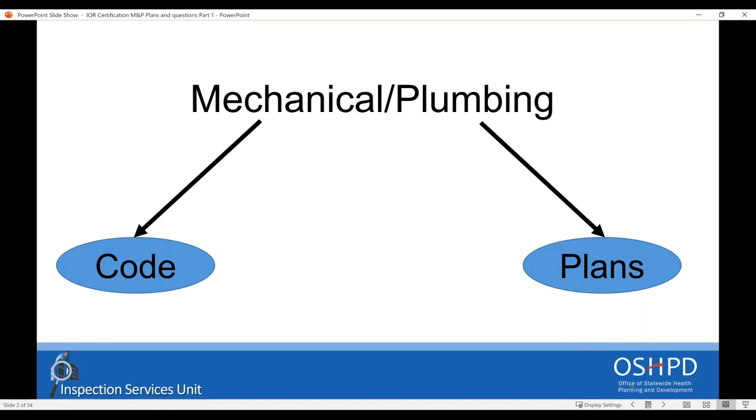The mechanical and plumbing discipline has 2 parts of the exam, the code part and the plans. The code portion for Class A will have 10 questions, for Class B will have 12 questions.

A sample that is not included in the actual exam about code for mechanical reads: in fuel gas piping, per pressure testing and inspection, the minimum test pressure and test duration for a hospital with fuel gas piping at house pressure should be no less than, and there are 4 options for answering. But how are you going to look for the response, unless you know right away?

In the mechanical code, there is a list of chapters, like any other discipline. In the chapter list, there is fuel gas piping, which is chapter 13, as you can see, highlighted in yellow on your screen, maybe tiny right now.

So what would you need to do? You will go to chapter 13. The question is about the test pressure, so you will look to the test pressure section, which is 1313.3. You will read through, and it's highlighted where it says no less than 10 psi, and in no case less than 15 minutes. Therefore, the right answer will be C.

Is anybody having any question for this? Raise your hand if you need.

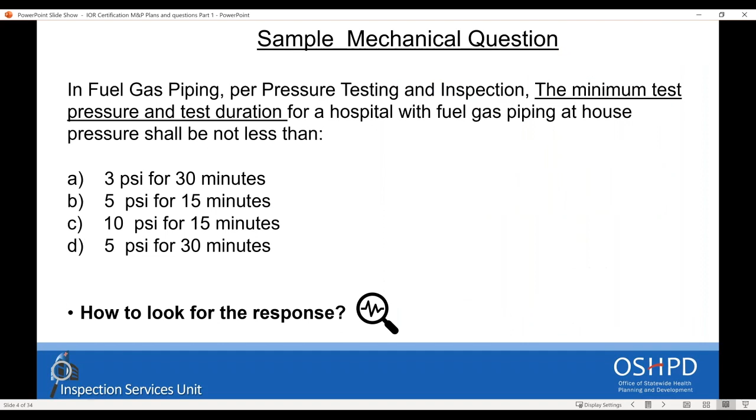I caught the tail end of that slide. You said for Class B there's going to be 12 code questions for MEP, and I missed the part about how many plan questions for MEP. We will go for the plan question in the next slide.

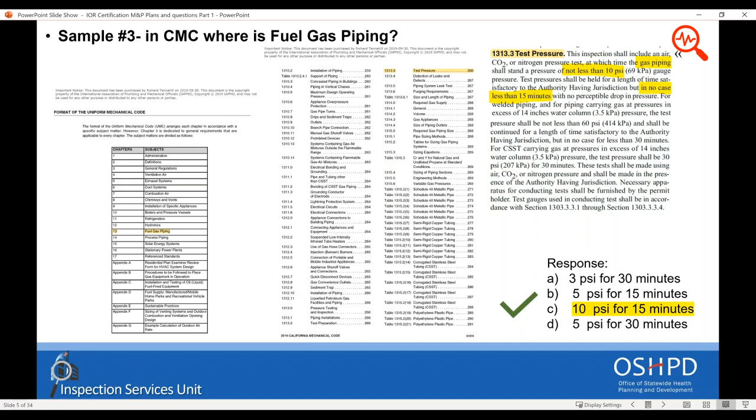Continuing, and to answer the first question, for the plan, Class A will have 13 questions and Class B 9 questions. Again, it's a mix between mechanical and plumbing, so overall it will be 13 questions for Class A and 9 questions for Class B.

Before going to the examples for plan reading, we want to share, like we did in the prior webinar, a few things. If you participated in the prior webinar, what we are going to say for a few slides you are hearing again; if you didn't participate, you will hear it for the first time. The reason for this type of webinar is to guide you through the right process for the exam. Let's analyze the question with the correct responses, how to read them, how to interpret the questions, how to arrive at the response. Sometimes the approach is easy, and sometimes it's not, like in the actual construction process.

Remember, the plans are not perfect. Therefore, not even the plans that we are going to have for your exam will be perfect, because perfect plans don't exist. This is why RFIs are issued during construction, right?

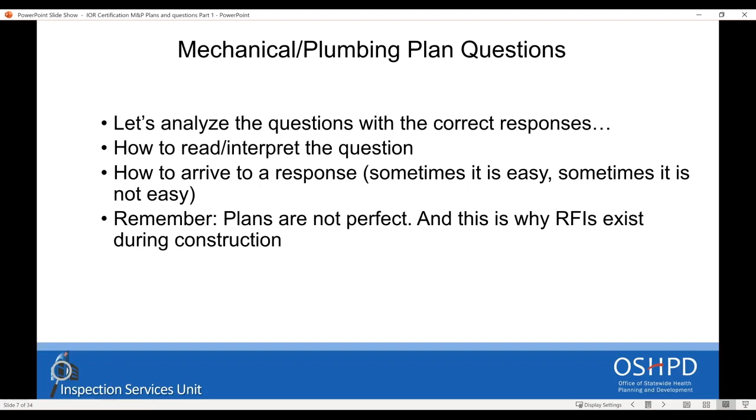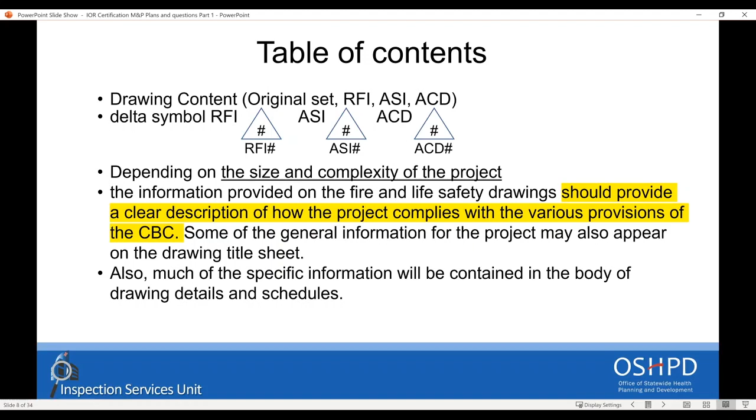What do approved construction documents contain? They have the original approved set, RFIs, no material alteration changes, and material alteration changes. The information can be anywhere in the drawing, but usually general information of the project appears on title sheets, while specific information is contained in drawings like details and schedules.

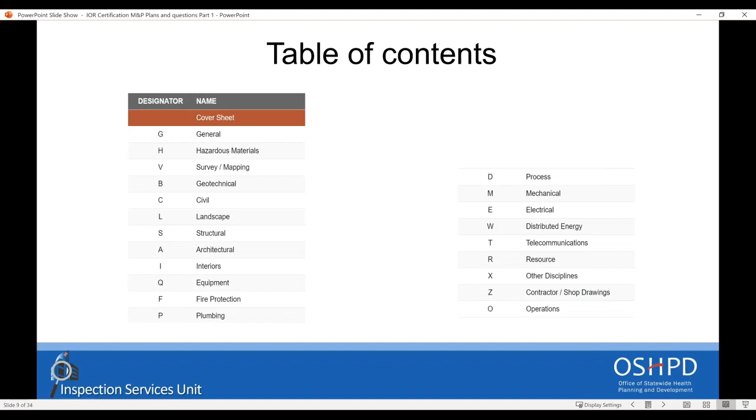This is an example of how a table of contents looks. You can see here the different disciplines. This is, of course, an overview of what could be in the different categories and what you can have in a set of plan documents. You may have all of them, or you may have few, depending on the scope of the project.

Each discipline contains general information like symbol legend, abbreviations, and general notes specific for that discipline. They also have plans, elevations, sections, at different scales of drawings, details, scheduling, diagrams, and sometimes even 3D drawings if necessary.

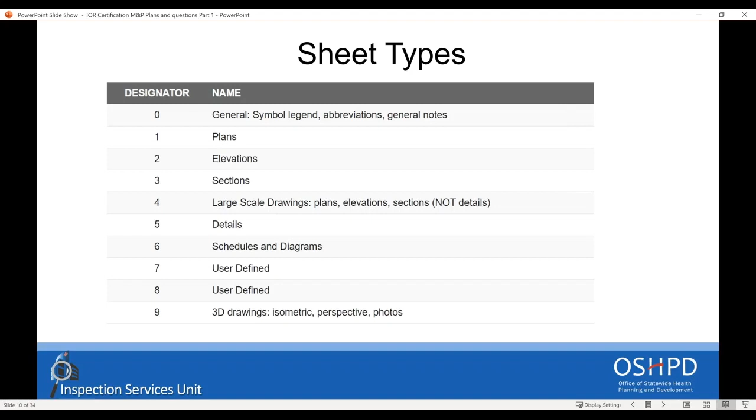In the example we're going to show you, you can see the different disciplines. The main ones are the cover page, the general notes, and the UL assembly. Sometimes the UL assembly is included into the specific discipline, and sometimes not. Sometimes they are in the general drawings.

Most important of everything: be flexible to navigate through the set of drawings, because the specific information is not always where you think it should be. So we don't want you to give up first of all — continue to be flexible and go through the drawings in order to find that specific information.

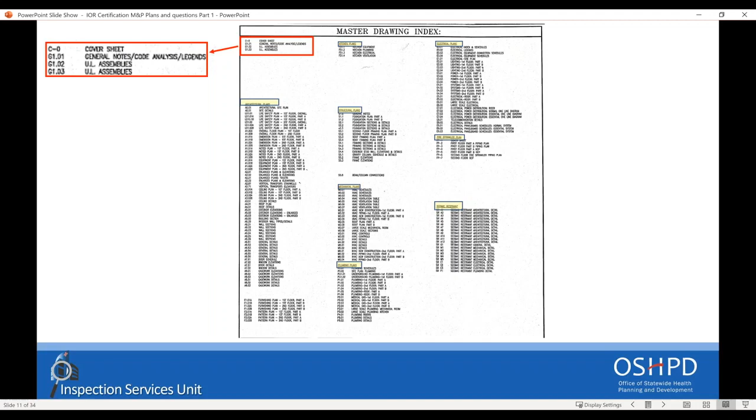Today we are going through the mechanical and plumbing discipline. We are going to show you the disciplines that are relevant in order to answer the plan reading questions for the mechanical and plumbing portion.

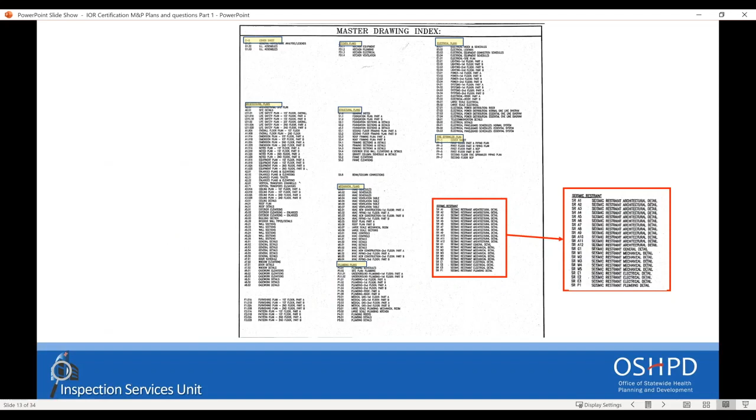The mechanical and plumbing relevant drawings are, of course, under the mechanical and plumbing discipline. Under those disciplines, you can find schedules, tables, floor plans, enlarged plans, sections, and details. You might also need to look into the seismic restraint discipline as well. So again, you need to be flexible.

Something I'd like to remind you is that you need to look in the drawing — look into the notes, keywords, typical details, general notes. But most importantly, you sometimes need to look across all disciplines, because to make a good project, all the disciplines need to talk to each other. This means that sometimes information you think should be in the mechanical and plumbing plans isn't there, so you need to look in another discipline.

So let's go with the first example. We will go through, read the question, arrive at the answer, and then we will stop. If you have a question, raise your hand, and we will go through for clarification, example after example.

The first question reads: what is the inlet pressure to the single stage pressure reducing station? So where do you think you should look? There is a good chance the information is in the detail drawing, so go to the HVAC detail. If you don't know where the HVAC detail is, go to the master index sheets, and from there you will go through the mechanical drawings and see where the HVAC details are.

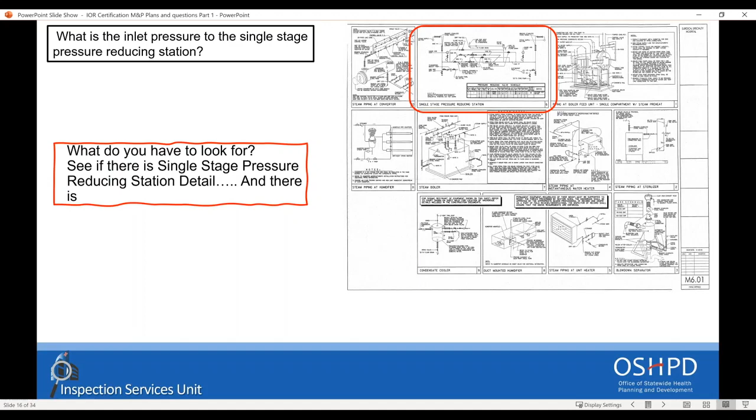In this case, it is M6.01. Once you find the detail, look into it — there is the schedule, and on this schedule you can find the PSI information, which is 60, and that will be the answer. That being said, if there is any question, raise your hand.

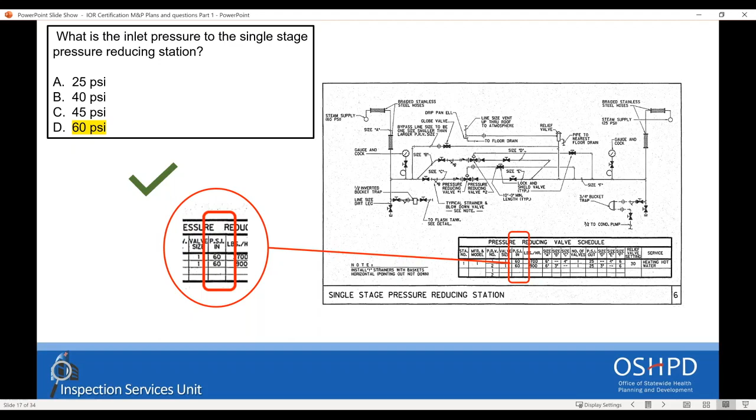Okay, so let's go to example number 2. It reads: the source valve for the nitrogen system is located in room, and there will be a list of rooms. So always remember to start your research from the index of drawings that will be accurate for the exam. First, you need to look into the symbol used for the nitrogen line and where you can find it. Where could the legend be?

In this case, in the P0.01, you find the medical gas line legend, and you find the nitrogen line with the symbol, which is something that you need in order to answer the question.

Okay Monica, would you mind repeating that? I think the audio was a little... Yeah, of course. Can you repeat that?

Of course. So what you need to do is look at the line. How is the symbol for the nitrogen line? In this case, the drawing is P0.01, where there is the medical gas legend. In the medical gas legend, which you can see on the left of the screen, there is highlighted in yellow the nitrogen. That is the symbol, the line N2, and the line is the symbol for the nitrogen, okay?

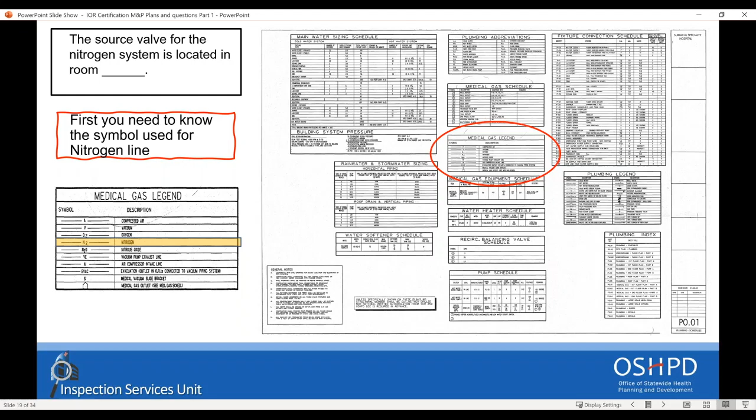Then you need to think about where the location would be. Typically, it is in the med gas room, but where is the med gas room? Usually it's not easy to find in plumbing drawings because the drawings might be way too busy with other information. So how can you find the number for the med gas room?

Use different floor plans, and this is why you need to be flexible. Where can you find which floor plan you can use? Whichever you want. In this case, we are using the life safety plan, because it is ideal since there is less information, so you can read better the name of the room and the room number.

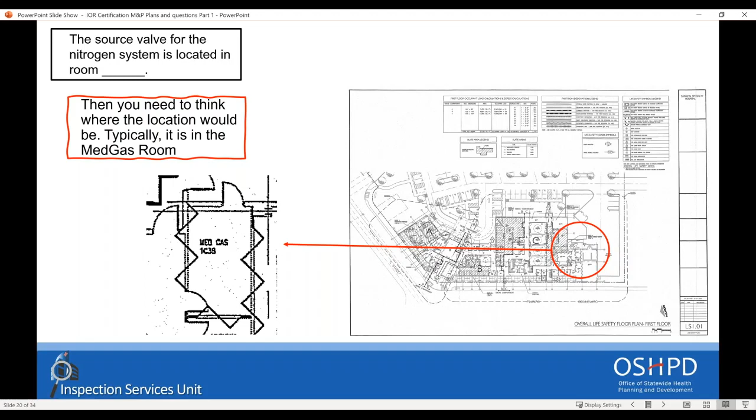Once you identify the med gas room, go finally to the plumbing drawing, and look for the room, look for the nitrogen, and you will find the nitrogen source valve. And that is the answer, so it will be 1C38 confirmed.

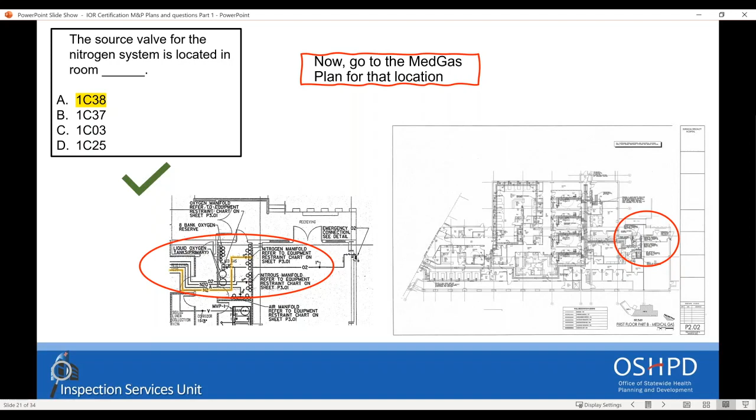Yeah, that's a great question. Thank you for raising your hand, Alexander, and posing that question. That brings up a good point that no question is a silly question, because the person next to you might have the same question. So feel free to raise your hand, and we can call on you for that discussion. Thank you for that, Alexander. I don't see any other hands raised, Monica, so if you wouldn't mind, continue with the presentation.

Okay, thank you. Let's go with example number 3. It reads: combination fire and smoke dampers are installed in the supply or return duct penetration through the wall of electrical room 1C26. The answer would be true or false.

One thing we want to remind you is how to read the room number. So if you see 1C26, that means number 1, that it is on the first floor. If it was 2C26, it would be on the second floor. If it was 3C26, it would be third floor, and so on. So what you need to look for is room 1C26, which is first floor.

If you cannot find it in the HVAC drawings, because the drawings are too busy like in the other example, start to look at any other floor plan. Our advice is to go, if possible, to the life safety drawings, because they are the easiest to read. So in this case, you will go to LS 1.01.

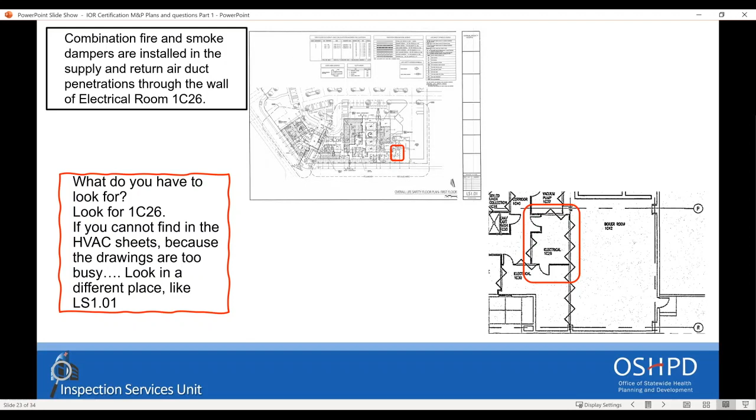Even if you know the symbol for fire and smoke dampers, it doesn't hurt to look at the legend and confirm that. So go to the HVAC schedule, M0.01. You find the HVAC legend. Look for the combination fire and smoke damper, and that is the symbol.

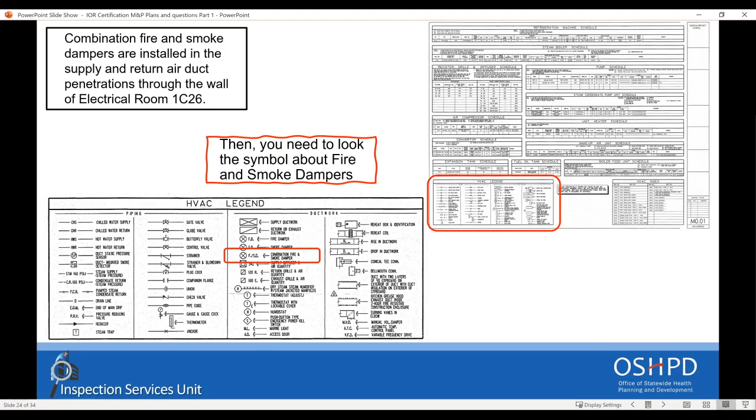So now that you know the room, now that you know the symbol, you go to the mechanical plan and you need to verify if it's there or not. If it's there, it's true. If it's not there, it's false. Since it is there, the answer is true.

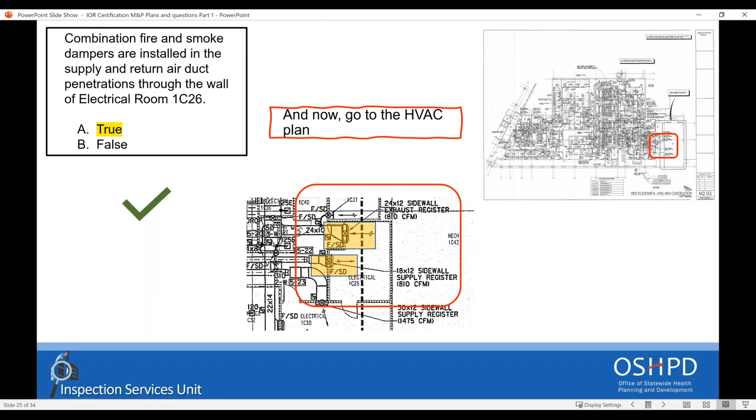Monica? Yes. Before Monica starts, I've been in the field for a little over 20 years, going on 25, and it's unlikely that we will have fire life safety plans. However, architects are the discipline that is pretty much controlling the set of documents, and always the architectural drawing will have the room numbers, while the other disciplines are unlikely to have them. That's due to the fact that there's too much information to be shown, and even if room numbers are shown, you won't be able to read them because structural drawings are framing plans, right? Just too many lines. Same thing for MEP: it's line diagrams for electrical circuits and lights, and mechanical is all that ducting you've seen on the drawings. And then there's the reflected ceiling plan, right? So if we were showing room numbers, it would be very difficult with too much information shown on the drawings, and that's the reason most other disciplines do not show room numbers, and even if they do, it's difficult to read them. That's why navigating different disciplines' drawings is always required, and that's why we try to teach you and give you this basic fundamental understanding of how to navigate a set of drawings.

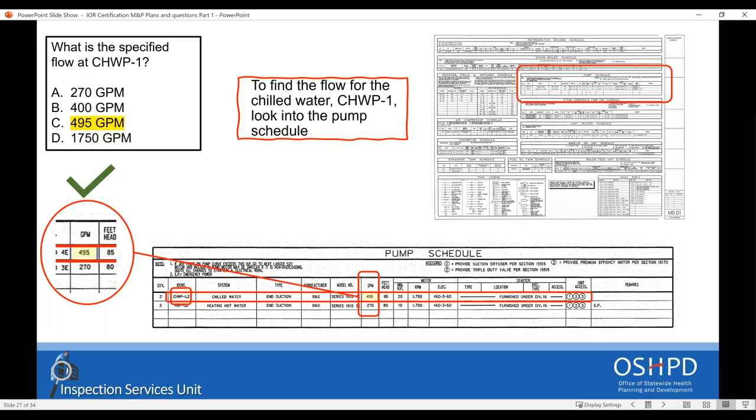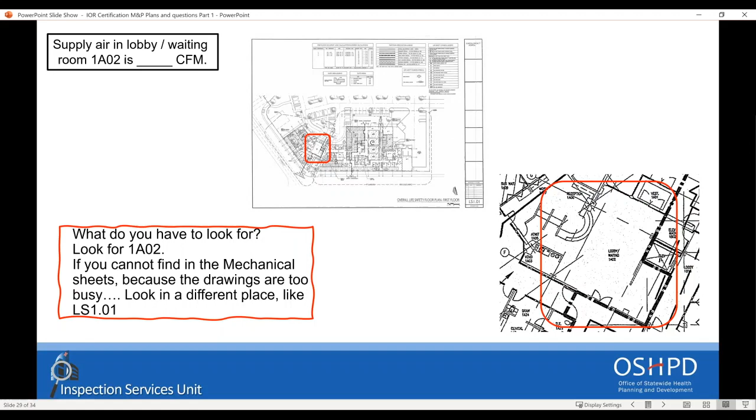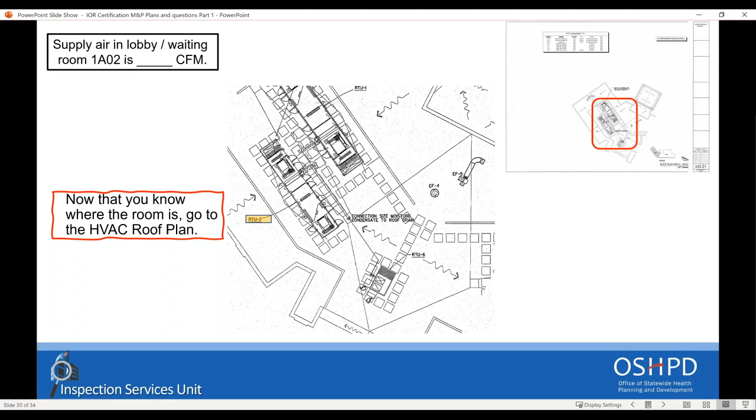Now that you know where the room is, go to the HVAC roof plan, that is an option. So you go to the roof plan, which is the corresponding area above the 1A02, and there you can see a highlighted RTU-2. Knowing the RTU-2 is the unit for 1A02, you go to the schedule for RTU-2 and find the supply air CFM information for room 1A02.

If you go directly to the RTU schedule and want to find the room, you have to go through the overall schedule and find the dedicated area. This is why it's important to read the question where it says lobby waiting room, because on the RTU schedule it's divided per dedicated area, and for RTU-2 the dedicated area is X-ray/waiting. So 1A02 is lobby waiting room, and no matter your path of logic, you will arrive at the RTU-2 schedule, find the specific room information, and the answer will be 1,400 CFM.

If you have any question, raise your hand.

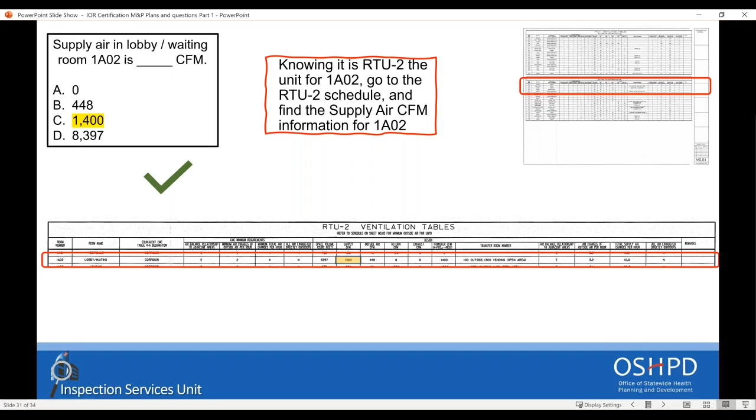Yes, of course, thank you.

So what's going on now is we are going to get to homework. There is homework 1, you will read, then there is homework 2. What is next? What is coming up? So it's up to you. It's not an obligation at all.

You can submit to us on the slide, this one, where there is the OSHPD website. On this, you will send to us your response, which one you think is the right response of homework 1 and homework 2.

On Thursday we are going through these two homework. The presentation will be shorter because we will only go through these two homework, versus the 5 examples will be just 2. This is like an additional exercise. We are also going to upload for Thursday additional practice questions for the plan, and it's up to you if you want to use them or not. It's not an obligation.

All of this is to help you get prepared for the exam. So it's not an obligation, it's good advice, but it's not an obligation. On Thursday we are going through these two homework.